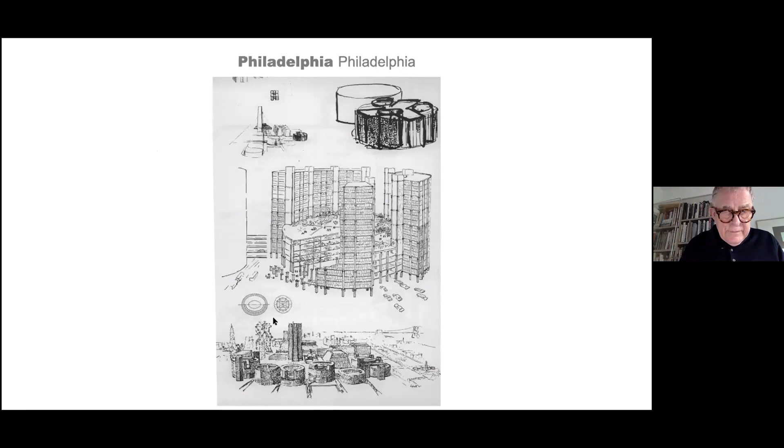What we notice over in this corner is a very intriguing building, a geodesic office building proposal. And for a while, through Anne Tyng, who worked in his office and with whom he had a relationship and a child, and treated rather badly, I might say, but Anne Tyng was a geometer and was in touch with Buckminster Fuller, and Fuller was not dissimilar to Kahn in that he was a romantic and turned technical issues into representational issues. But Anne Tyng's contribution to this building and others has been forgotten. And my ex-student, Sofia Del Bono, will rectify that by giving a talk on Anne Tyng's work in the future of this program, and that's not to be missed.

The Yale University Art Gallery. Before I go to this, what I want to talk about is Kahn's geometric thinking. Geometry for him had some mystical association, or it was a Platonic ideal, and he very frequently articulated buildings into parts. And this was completely different from the European functionalism, where forms and appearance would be generated by use in order to give a legitimate architecture for modern times. He saw this as part of order, and order was a cultural construct. And he saw the archetypes of order in human history. And his geometricization stemmed from a deep feeling for the architecture of antiquity. And you can see that in the study drawings that he made quite late in life.

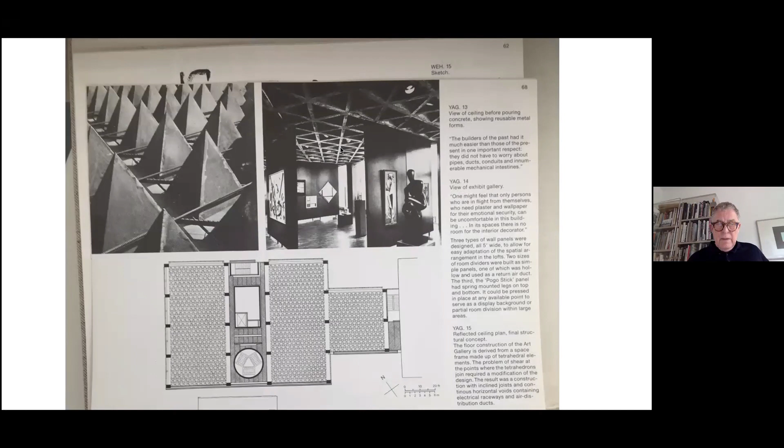And a good building is one the client can't destroy by the wrong use of space. But I think he relented on that. I think that was the anxiety that came from the first significant building he made. I don't have an image of the gallery space, but it's not a success. The light's in the wrong place, and the shape is very peculiar. It has this wonderful staircase, which developed more significantly in the Yale Centre for British Art, which we'll look at.

The Richards Medical Building, which I visited with the students last year, again is an early project which I think has problems. Interestingly, it's a series of small rooms where people can look across to each other, but also look out to the city. And to be fair, Kahn made the proposition that scientists shouldn't work in the lab, they should have a studio. And this is something that he carried out more fully in the Salk Institute.

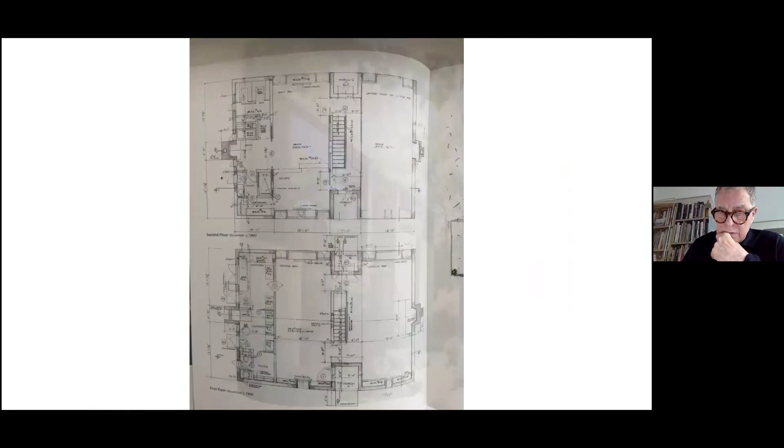What you see here is the start of Kahn's tendency to want to make the facade design have openings in it that are bigger than you can and should put glass in. So he makes the opening bigger. This is something that occurs later in the Phillips Exeter building, but he makes a big opening, then he fills it. When he puts glass in, it doesn't open, which is sort of counterintuitive. And then in this project, he puts opening wooden shutters on the side, and of course it compromises the scheme.

And in this building, the thermal insulation is obviously terribly poor. I think it's a 9-inch cinder block, and these are uninsulated. So God knows what it's like in the winter, and it does get cold in Philadelphia. But to explain the plan, you come in here through an entrance porch, and there's a coat cupboard and kitchen and dining room. And then you go into this double height living room, which has got a fireplace, bookshelves, and then windows to the back garden.

And then here you go up a stair and you arrive on a landing which overlooks the double height space. And it has what he says is a porch front and back, but you'd never want to go out there because it's too small. All of this is to make something happen in the facade and to make some overlooking in the living room. And on this side, it's a bedroom, dressing room, bathroom, and study.

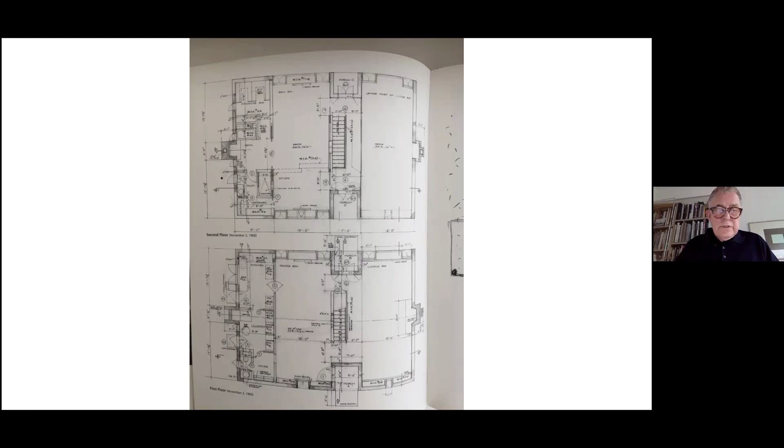And, sorry, I'm having a problem changing. Here we go. Sorry, it's changing very slowly. Bear with me. Yeah.

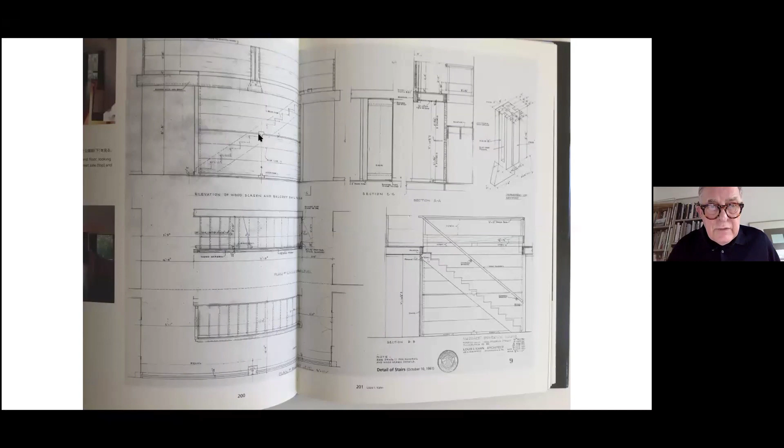And this is really wonderful. You can see there's a post there and these planks slot into it. And these planks are held together in the middle by a wooden fitting. And what strikes me about this is that, yes, we know in modernism that the appearance of an object or a part of a building had to come from its use and material.

But I think something else is happening here, and this is speculation on my part, and I might be held down. But it seems to me that this is from another tradition, a tradition that's tinged with Shaker construction. If you know Shaker construction, it valued simplicity of objects, and it made buildings that are very simple. But that simplicity wasn't what we see in the modern movement. It was simplicity to represent a kind of purity or a state of being. And I think some of that I sense in this piece of construction.

At Phillips Exeter, Kahn made the library. Phillips Exeter is a rather posh, well, very posh secondary school in New Hampshire, and has this very sober building set in a field, so it's quite special. And as we saw in the Esherick house, the openings are very, very large, fixed glazing in them, and then elements that can move, as I'll show. And it's connected to a dining hall by Kahn.

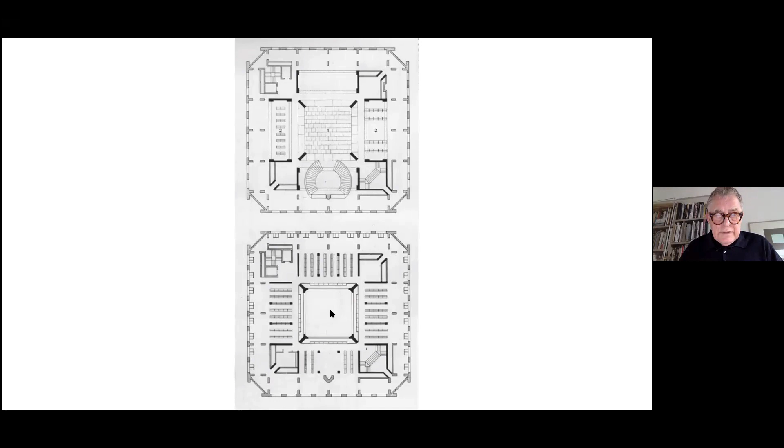And this is the plan. This plan doesn't show the level that you enter. You enter on the floor below here, and you come up a staircase to this level, which is the main level where the librarian sits, and there's a study area. And as I understand it, it's a colonnade around the bottom, which is separated about here. And then above, there's a central atrium with a roof light above it, book stacks, and then on three sides here, reading carrels, study carrels.

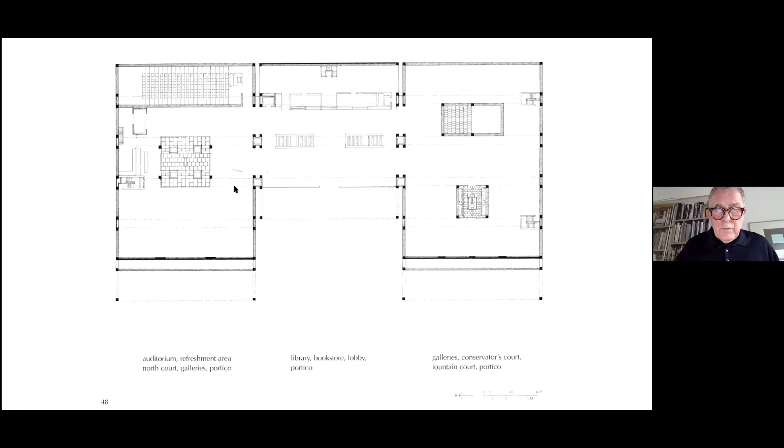And here's the plan. So on the front part, this arch here is simply a place to sit in the shade, and you go right in. There's another arch which gives you shelter at the entry point, and then there are gallery spaces here and here, and then a courtyard that I'll show, one here and one here. So you approach the building, and there's a pond of very shallow water spilling over the edge. And so you experience that sitting in the shade of this arched element here.

And that's what it looks like as you approach from the park. You go through a rather European gravel courtyard with trees in it. It's unlike anything else I've seen in Texas. And as I say, there are spaces in these arches outside for you simply to sit.

If you approach from the road, you come up here and you see a composition of concrete and travertine, which is very much like the early Renaissance, where rather than using projections to make a classical facade, the early schemes used different materials. As you walk along here in this space, you see there's also some water. So it's very subtle and very, very urban and generous. On the other side, the approach is along a step ramp.

And looking over this wall, you see the car park. And as I said, Kahn's desire was to incorporate every element, or the symbolic elements, of modern life in his architecture.

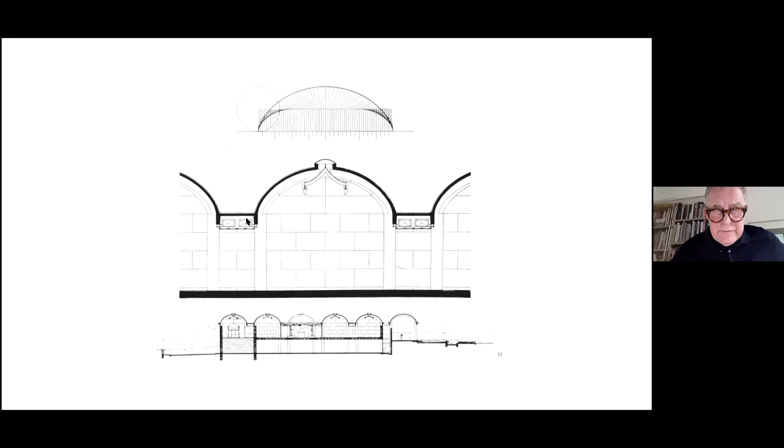And it's intriguing, you know, it does something, and its form is not functional. It functions, but it's not a functionalist form. And it's something you want to look at. It's surprising, you know. Often in galleries, the lighting is the most intrusive part. The ceiling is the part that works least well. Here, it works beautifully. Somehow there's no attempt at minimalization. There's just the necessary things treated very beautifully.

And this is what I meant to say. This is the collection. The collection is richly colored. And some of the walls are in travertine. Some of the floor is in travertine. And it works. It works. And it reminds me of a moment when I was in Lucerne a long time ago. And the gallery there was a white gallery.

And the director explained to me that originally it had been designed with small rooms with wallpaper, because that was the kind of setting that Matisse and Picasso expected to hang their work on, because their clients were bourgeois. And so the Matisse painting was never intended to go on a white wall. It was intended to go on a heavily decorated surface. And so what I'm saying is there are lots of different ways of displaying art, and this is one of them, a great way.

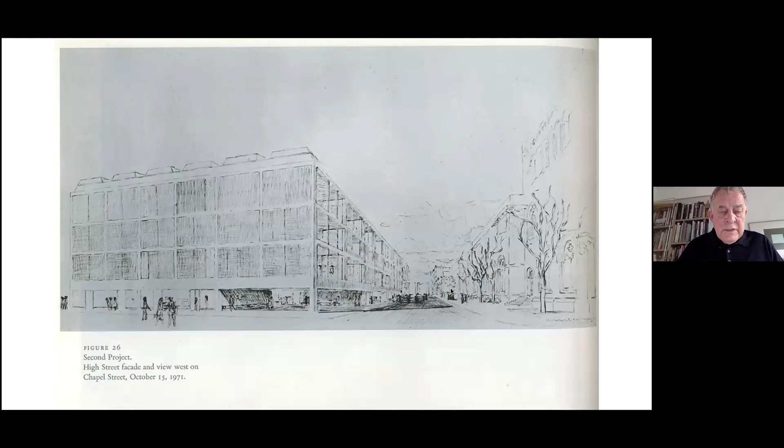This is Kahn's, it's called the second project. It was near the final project, and it shows a building, the concrete structure visible on the outside, filled with some kind of paneling, and then this side would be open, and in the corner there's an entrance, and this street down here is Kahn's earlier Yale gallery that I showed. But it didn't turn out like that. It turned out something far more wonderful.

It turned out that the paneling became terne-coated stainless steel, or at least that's what people think it is, but it's not been identified yet. And each panel is different. Each panel reflects the light differently. And you would think that maybe that would create an order for the fenestration, but no, it didn't. Kahn and his office allow this fenestration to be what the room needs, maybe too much so, and what you can see is sometimes you can look up and see through the roof lights of the gallery space.

And then really strange and in a way unexpected combinations of scale, very clumsy. Clumsy in other people's hands, in Kahn's hand, just shocking. And then on the rear side, these narrow windows, vertical narrow windows, and then one like this, one like that. And then in the car park, sorry, I missed my slide.

What these panels do is they have a drip, which is bigger than it needs to be. And that says one thing. And then the window sills in the shops. These shop fronts are all in stainless steel too, or some other metal. And the edge treatment's different. This one's about getting rid of the rain. And so it's a building detail which is made expressive. And this one is a building detail that's made tactile. So it's something you might think you could lean on if you ever thought you'd lean on it.

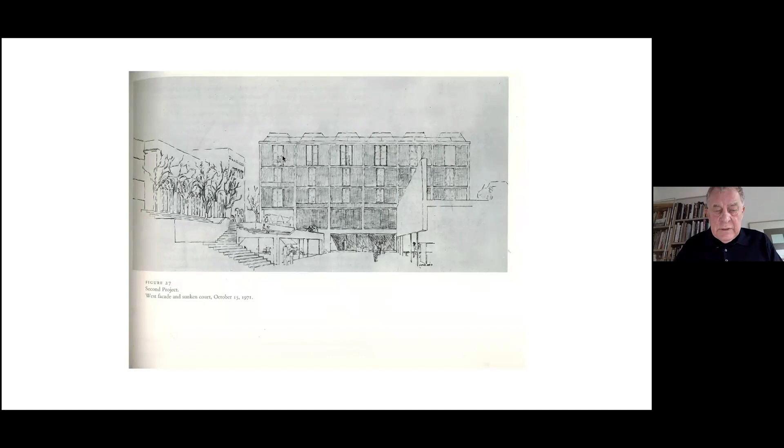And this drawing was of the west facade, rather modestly composed vertical windows, but it didn't turn out like that. It's much more random, as I've said. And in the back of the car park, it's completely solid. There's something so well composed about this, about parking your car against that. And these rooms, as I'll show, look out into the car park. So the whole thing is made useful. The car parks are never incidental in Kahn's buildings.

So in the side street, this is the main street that goes down to Yale, the School of Architecture. And the entrance to the building is here. It's just the corner left out. And in an uncanny way, consciously or unconsciously, it rhymes with the space under that bridge, or it does to my eye. And this is what it looks like. The lights are part of Kahn's incessant desire to bring building services into the formality of the building and to make them look like classical objects.

So you see the entrance here. And then, of course, there's the fire hydrant and things like that. So it's all well handled. And throughout the building, things like this are just naturally there. The only thing I can't understand about Kahn's buildings is that the entrance doors are always so clumsy, but who am I to complain?

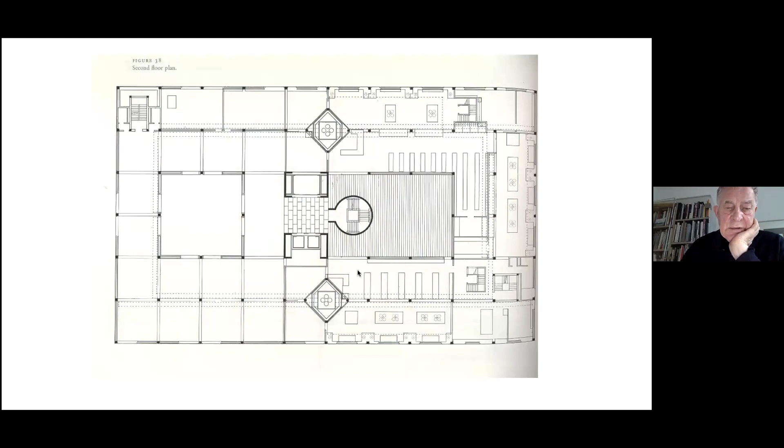But when you look up, you see an atrium like this. So you see a concrete structure, just as you saw on the outside of the building, on the inside of the building. And this is the plan. So on the floor below, you would have entered here and gone into this space and looked up. And on the floor above, there are galleries all around here, including here, and a staircase and lifts, which I'll

now show you. So from that entrance space, you go under this low beam. So it's very, the lowness is important. And if you go to St. Catherine's College by Arne Jacobsen, the entrance is very low and very horizontal. And it's not what most clients would expect, but it provides this wonderful moment of compression.

Then you go outside and you find the landscape, and something different happens here. I think what happens is that the upper rooms are brought close to you. Then there's a space to sit, and then there are the lifts. And the lifts, of course, are part of Kahn's repertoire of contemporary necessities that are built into the scheme. And then you see the staircase, which of course is a wonder.

And then on top of it is a glass lenscrete roof, and it's beneath the roof line, so it's daylit. In the depth of the building, it's daylit. And you leave that space to come into the lift lobby here. And you find that Kahn understood the collection. He understood that 18th century work, 18th century sculpture could stand against a wall of concrete.